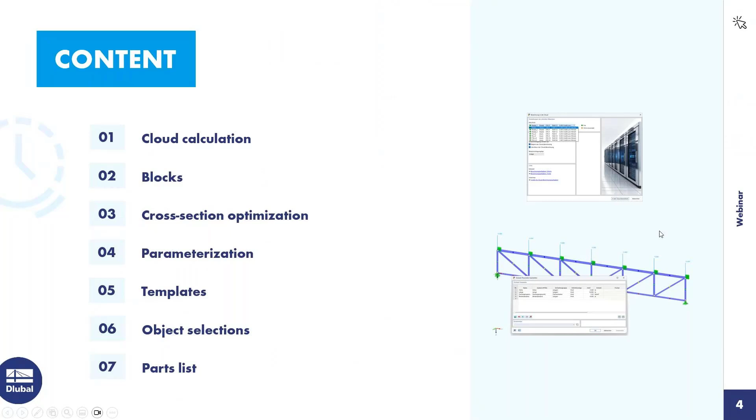So we turn to the first point, cloud calculation. What are the advantages? The most important advantage in my eyes is that your own computer is not burdened by the calculation. Also important: when you send the calculation to the cloud and you leave the program, another colleague, for example, can use your license. You don't block the license. It's useful if your own computer is not powerful or for large models.

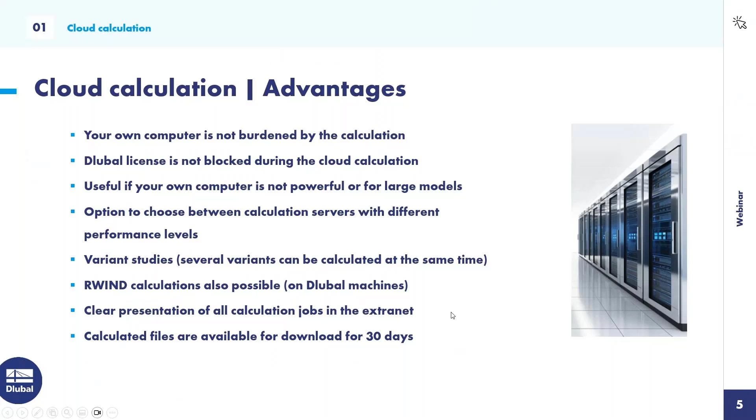You can choose between different servers; I will show that later. You can do variant studies. Also, RWIND calculations are possible. And you can see the calculations in the extranet or the calculation jobs. I will show that as well. And the calculated files are available for download for 30 days. That's the workflow. I will show the workflow directly in the program.

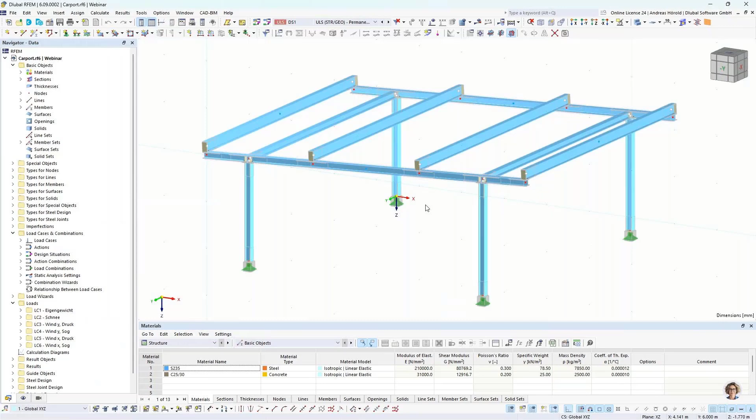Okay, then we turn to the program. That's a model from a former webinar with 16 steel joints. The calculation would take some time. It doesn't contain any results at the moment. That's why we would like to calculate it in the cloud. You can reach the cloud with that button, calculate in the cloud, or you can find it under calculate in cloud.

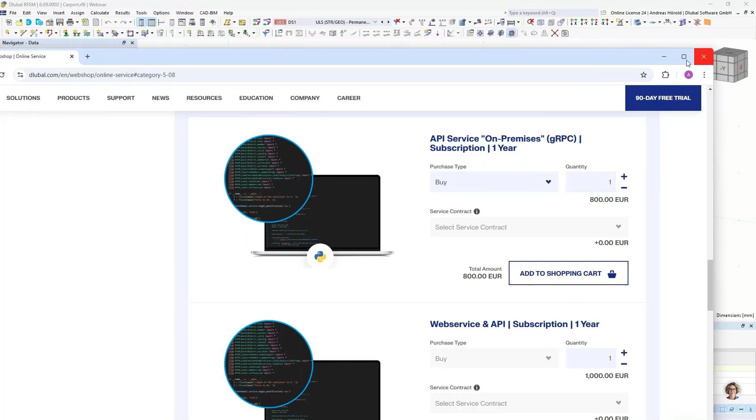So the first step is you have to buy credits for cloud calculation. I press that link, then we turn to our website. You have to select more from this category, and you see the credits, and you can buy the credits. If you buy 1,000 credits, it costs 100 euros, and 5,000 credits, 400 euros. In that case, one credit would cost 10 cents. Okay, we turn back to RFEM.

Then you need to select the virtual machine, the Dlubal servers. With those servers, you can also do RWIND calculations, and those are the Microsoft Azure servers. You can do a plausibility check before sending the file to the cloud. And you can also let it send notifications at the start and at the completion of the cloud calculation. I would recommend at least selecting that option, so that you will be informed immediately after the cloud calculation is done.

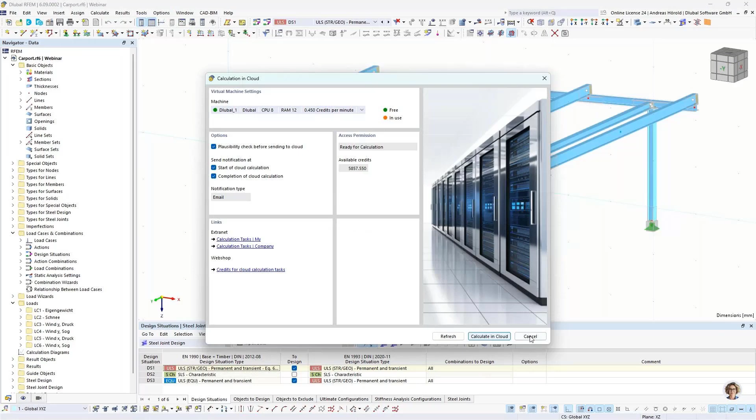Okay, then we would start the calculation by pressing that button. I did that already last week. That's why we turn directly to extranet calculation tasks. I also got an email with a link, but you can also find the link here, API and cloud, and you can see that's the file, carport. It was calculated successfully. That would be the price. Then I downloaded the file with that link. That's the same link as in the email.

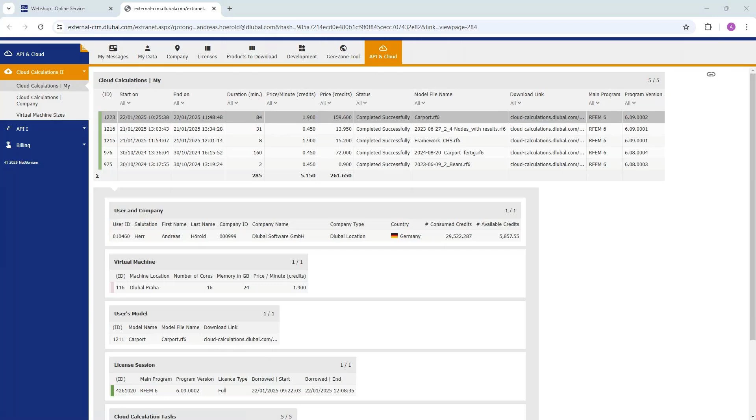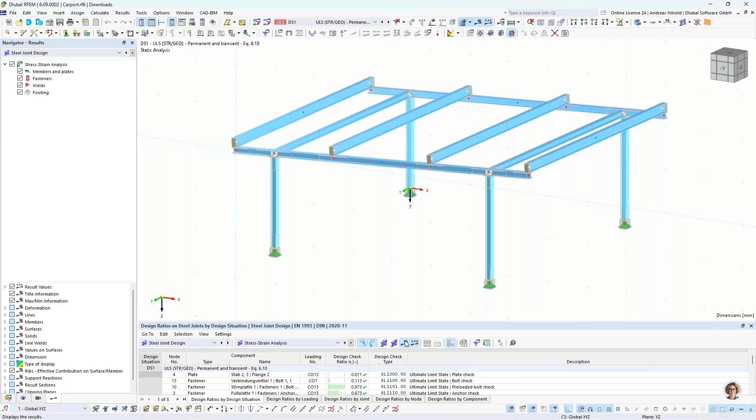And now I search it in my Explorer. Just a moment. At first I turn back to RFEM. And now I open the calculated file. It's more than 3 gigabytes large, that's why it takes some seconds until it opens. We wait some time. If the file is larger, you may get a zip file, and then you have to unpack it before opening. So now we have results here for all nodes and all joints. Okay, that should be all for the cloud calculation.

I close the files. And we start with a new file, and with that file I show the other features such as blocks, optimization, parameterization, templates, and so on. So, top left, new model.

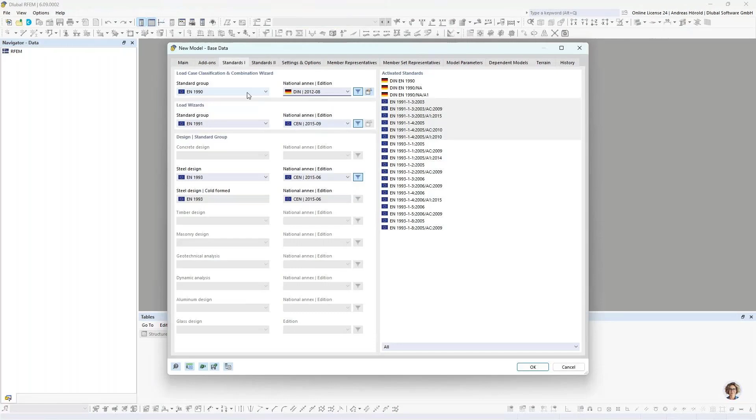I will show all on a truss, and I would like to do a steel design. That's important to select it, otherwise I couldn't show the optimization. I select the European standards and the German national annexes. Okay. And we use also member representatives.

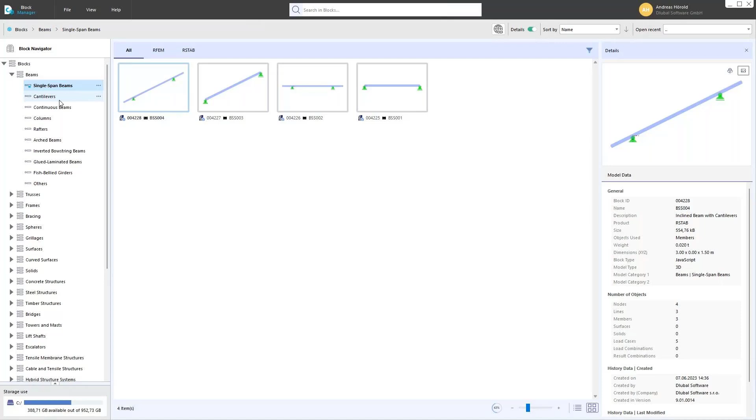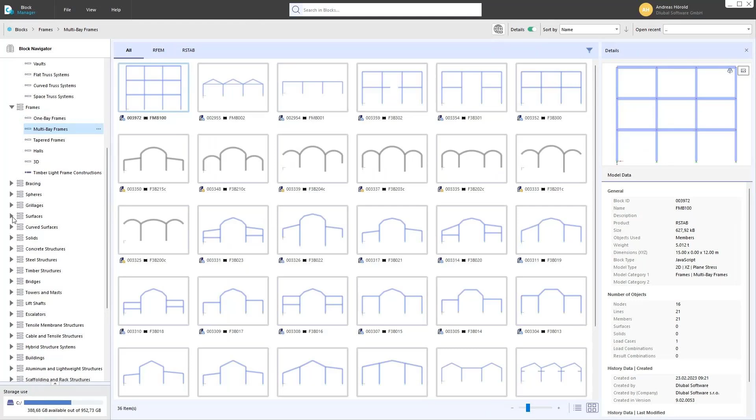So that's the empty model. And now I turn to the blocks. You can see that left above, block manager. And you can see all the parameterized blocks, single span beams, continuous beams, columns, arched beams, trusses, 2D, 3D frames, and so on. Maybe show some other things, surfaces.

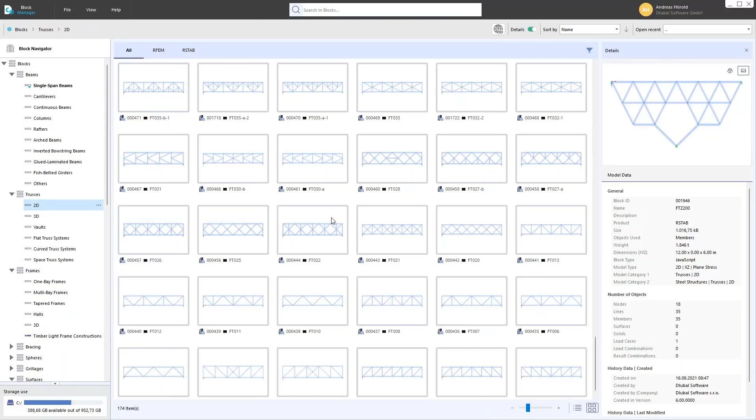What is also important, maybe bridges. Yeah, just take a look at the blocks, what is useful for you. I will show that on a simple example on a 2D truss. I select this one. Okay, those are the dialogues of the block. Main, structure, categorization, JavaScript. On the main dialog, you can, for example, select the position of insert point. That's okay in our case.

I think the most important dialog is the structure. You can modify the parameters. And in this dialog, you could change the JavaScript code. You could add more parameters. Just uncheck that button below. And now you could modify the code. I will show how you can add parameters without programming knowledge, but later.

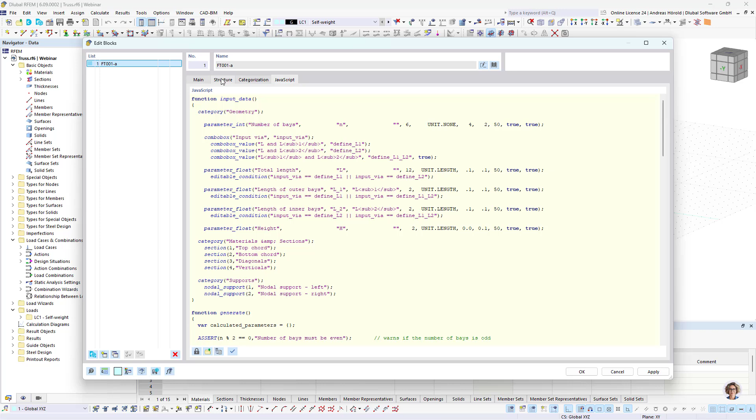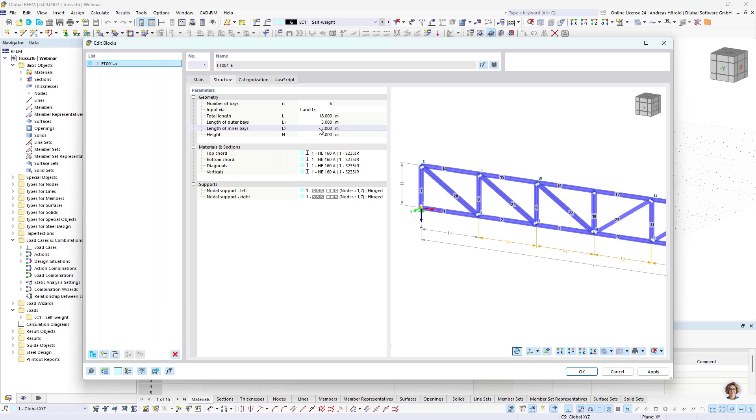Okay, then number of bays, that's okay, 6. Then input via L and L1. I enter the total length, 18 meters in our case. Then the length of the outer bay should be 3 meters. And the length of the inner bay is calculated automatically. The height is okay. I switch the view. So, and I modify the top chord. It should be an HEA 200. Okay, the material is okay, S235.

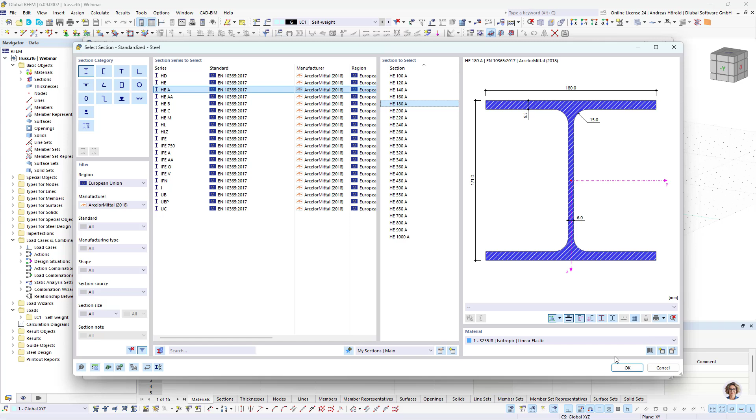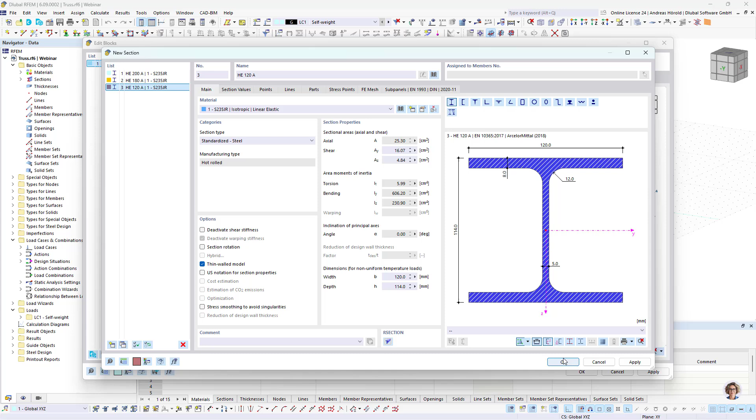Okay. The bottom chord should be also another cross section. I change it to HEA 180. This one, okay. And for the diagonals and verticals, we create a new section, an HEA 120, sorry. Okay. So the model, or the block is finished. We can press OK.

So, and this is our model. The member representatives are created automatically. All objects with the same properties or with the same length and the same cross section are collected in one member representative. And we have to select or modify or enter the design properties only for one member representative. But we will do that later.

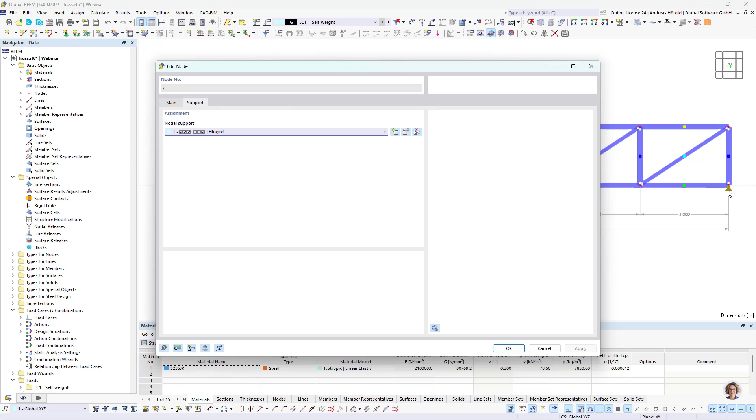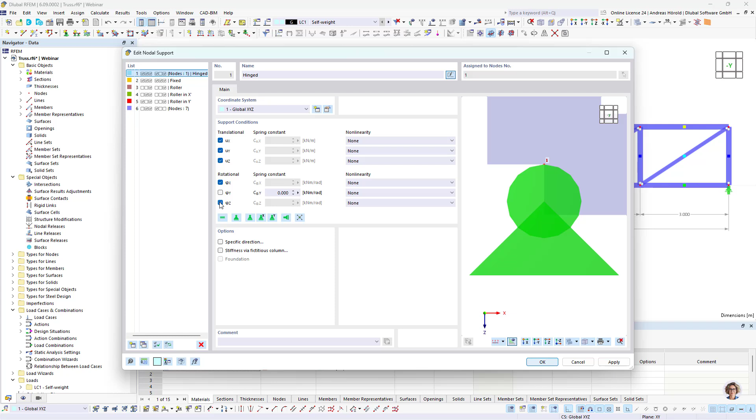So at first we explode the block with right click on blocks. And now we lost all the parameters. But as I said, I will create the parameters later with another method, and without programming language knowledge. So I modify the supports. This one should be movable in X direction. So this one, okay. So I also modified this one. Okay, around the longitudinal axis.

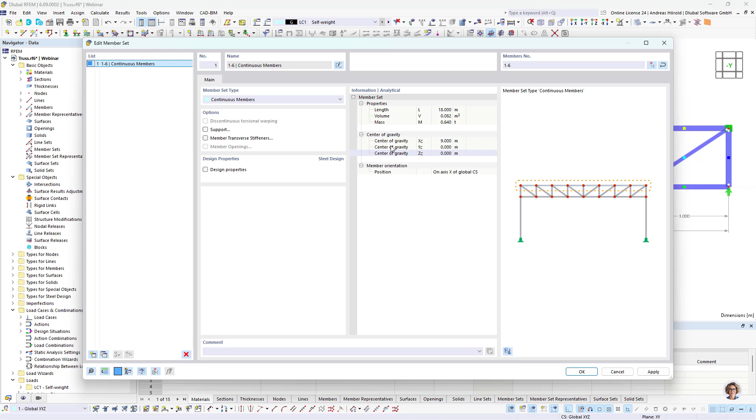Okay, and we have to support the truss in Y direction on the upper chord. So left above, new nodal support in Y direction. Okay. The model is completed now. We create a member set for the lower chord members. Create member set, because later we will check if the deformation for the 18 meters is low enough. So,

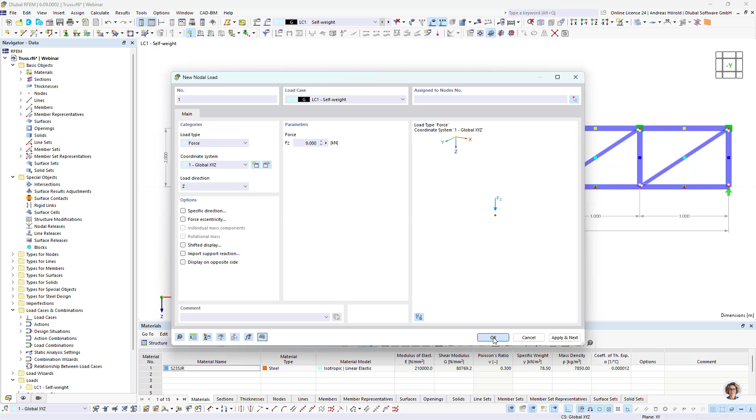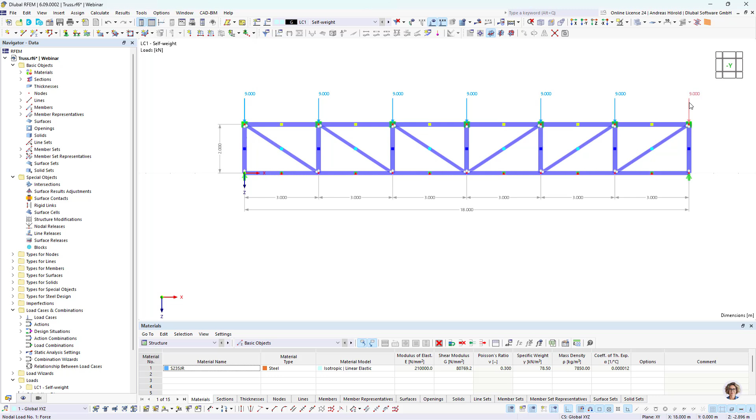okay. So the next step are the loads. We enter the load case self-weight, some forces, 9 kilonewton in Z direction. Okay. On the nodes. Can decrease it a little bit. Okay. Yeah, and we assume there are neighbor trusses. That's why the value at the edge is the same as on the inner nodes.

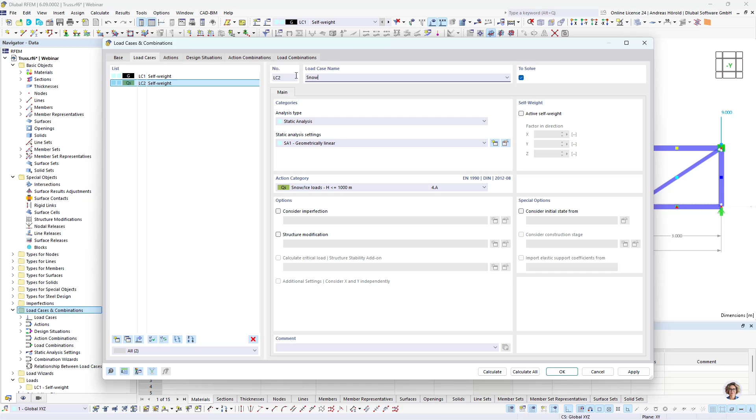Okay, so then we turn to the dialog load cases and combinations. And we create a new load case. Yeah, those are the base data that we entered at the beginning. Load cases. Now we copied that load case. We deactivate the self-weight. Then it should be snow. And we call it snow. Okay. And we have to modify the load. 15 kilonewton. Yeah, we have got only 2 load cases in that example.

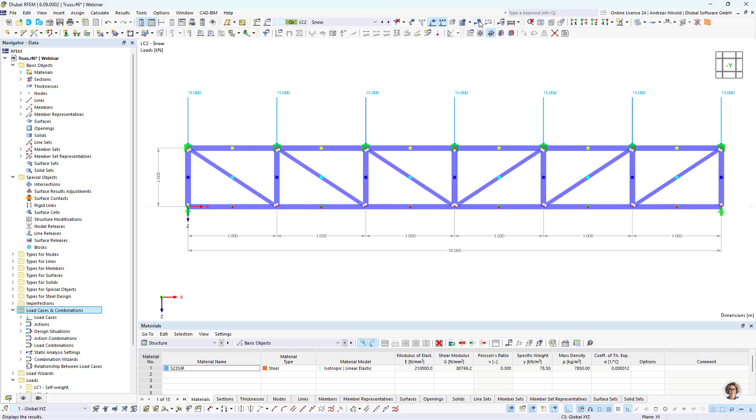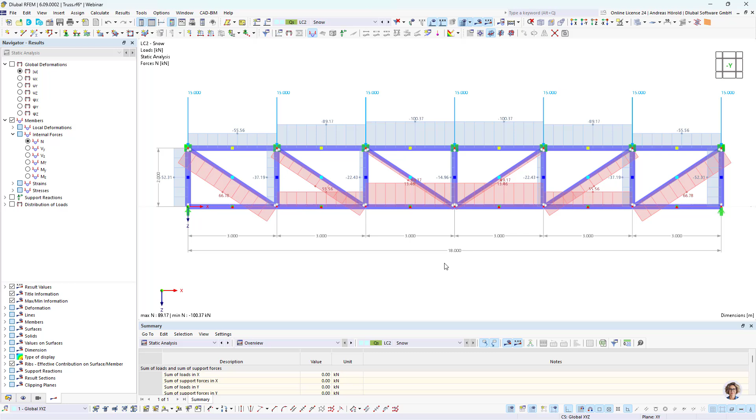That is enough. So in the next step, we create imperfections. But before we do that, we calculate that load case, so that we can see where is tension and where is pressure. The pressure should be on the upper chord and on the vertical beams. So members, internal forces N, okay. Now you can see there's pressure on the upper chord and the verticals. Okay, that's why we create design settings where we would check the buckling for those members with pressure.

Okay, and in the first step, we enter imperfections. New member imperfection above. I call it imp. Okay. We create initial bow according to Eurocode 3 in direction of the weak axis. Okay, and we apply it for the upper chord and the verticals.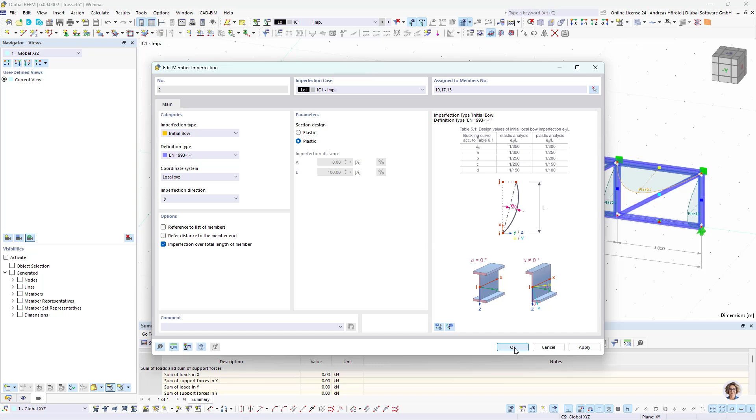So that looks almost good, but I changed the direction for these 3 imperfections. Double click, -y. Okay. Yeah, the curves are looking quite better.

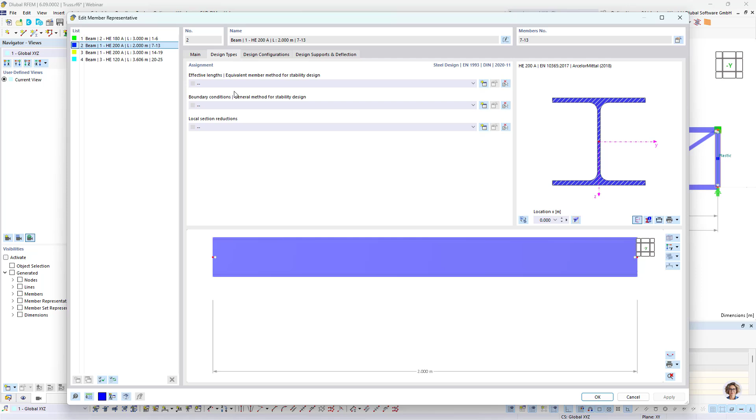So then the next step is we have to select the design settings. At first for this member representative, I enter a new effective length. That is what we determine the flexural buckling, torsional buckling, and lateral torsional buckling. So the supports at the beginning and the end are created automatically. And we enter the effective length factor 1.

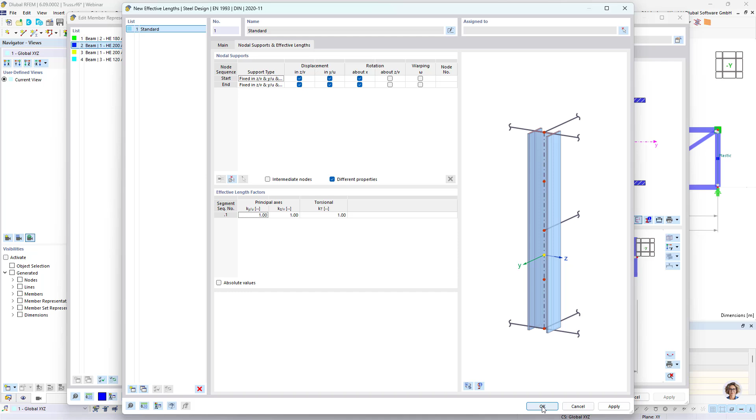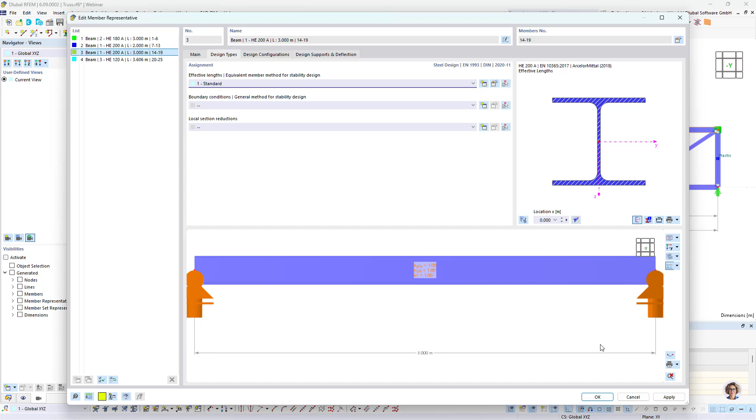We assigned imperfections. We calculate according to second order theory. And with these settings we can design according to Eurocode 3. Okay. And for the upper chord the same. For the member representative, design type standard, with the buckling length factor 1. And if you want to design according to the general method, you have to enter boundary conditions. We use the equivalent member method according to Eurocode 3. Okay.

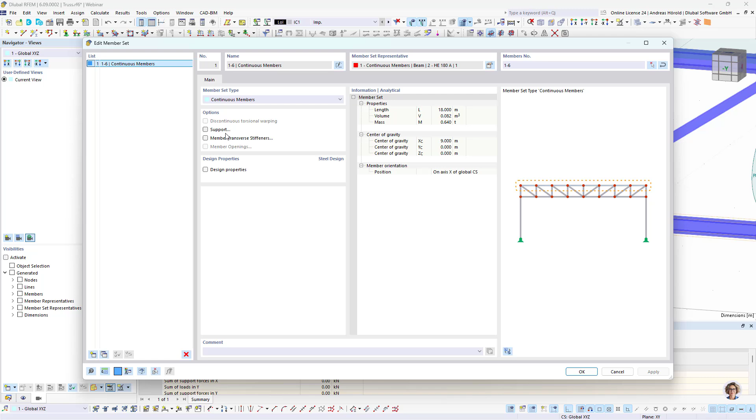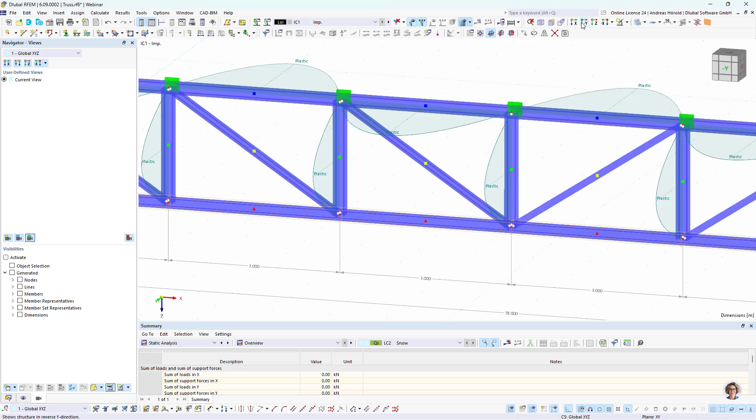So that's all for the ultimate limit state design. For the serviceability limit state design, we have to create settings for the member set. So I select design properties. And you can see where are the 18 meters. That's important for the deformation design. So we can start the steel design now. Okay.

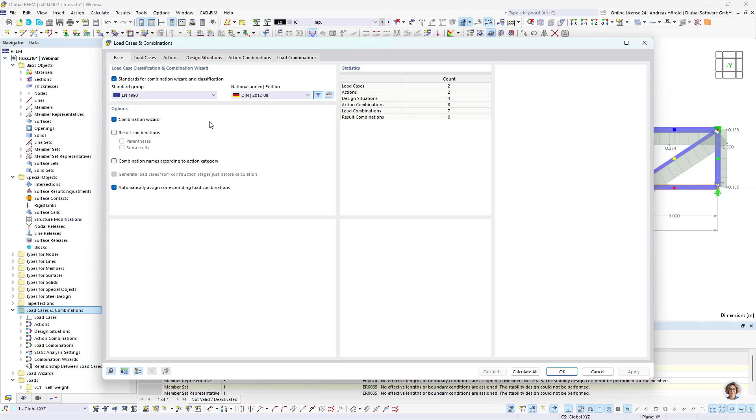I forgot something. You can see the design ratios, but I have to turn back again to the load cases and combinations, the design situations. We want to design only this design situation for the ultimate limit state and only the design situation for the serviceability limit state characteristic, and for the geometrically linear method. So we can delete these two design situations.

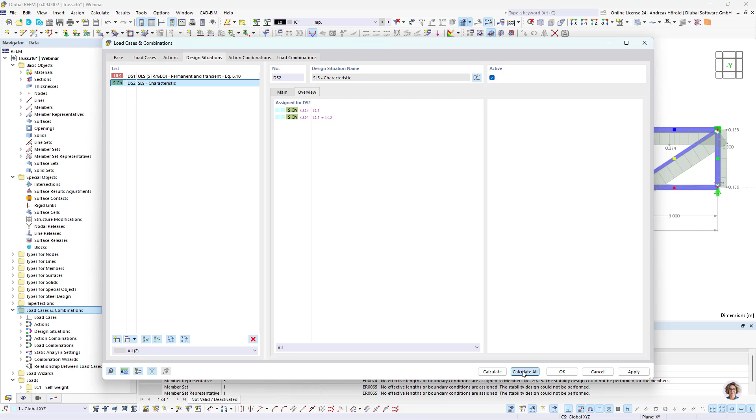So in the overview, we have to create the load combinations. And you can also see the imperfections are assigned to the combinations for the ultimate limit state design. And when I turn back to the design situations, you can see the assigned combinations. So that's okay. And now we can calculate all again. Now we will get the right results.

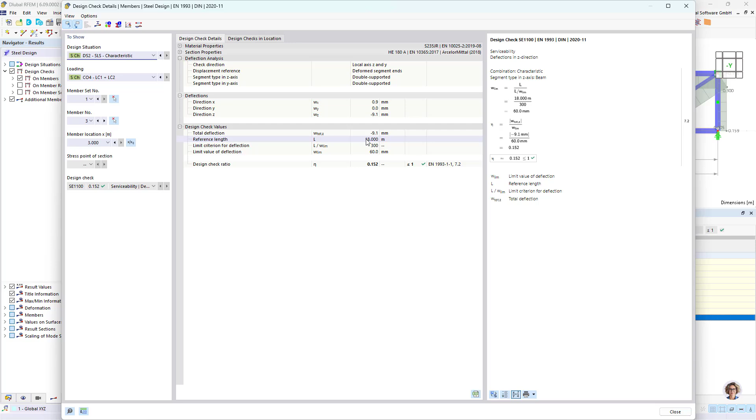Okay, design ratios on members. I select design ratios by section. You can see there are quite low design check ratios. And in the next step, we would like to optimize these cross sections. At first, I would like to switch to design ratios by member set. And you can see the serviceability design, deflection in z-direction. When I double click on that formula, now you can see the design check is for 18 meters. That's okay.

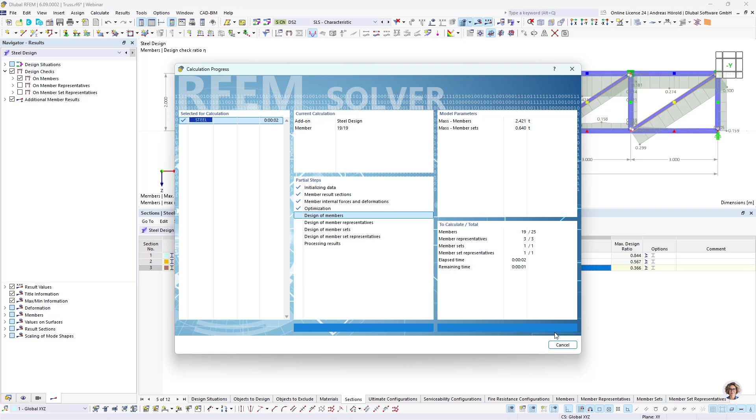So, as I said, we optimize the cross sections in the next step. I turn back to input data, then sections. You can see the design ratios, and we select optimize current row for all. And we do the steel design again. And now you can see the higher maximum design ratios. But the section for the global model isn't changed. We have to do that in the next step.

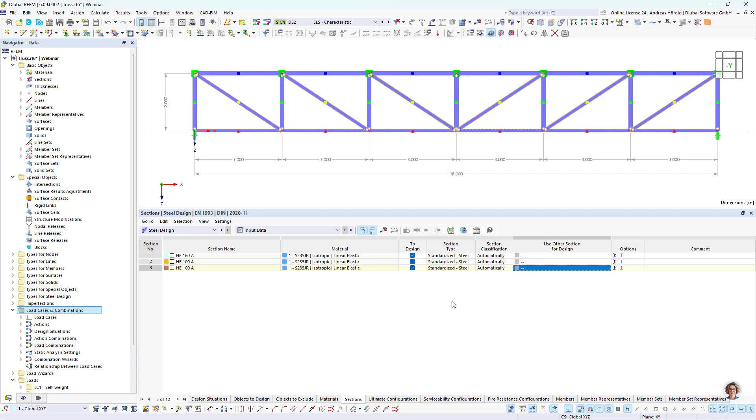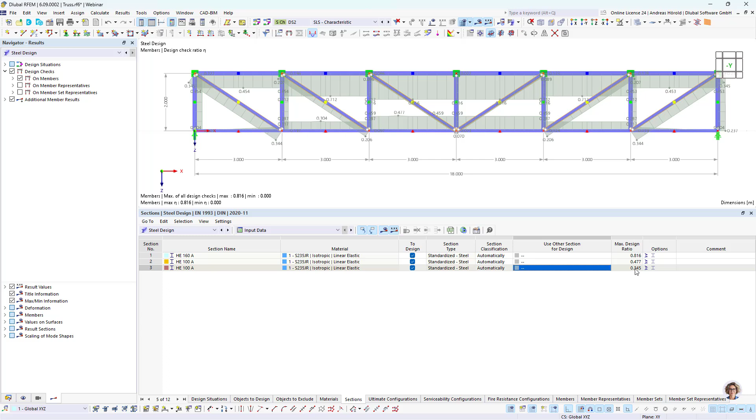Use all optimized sections in model, so that we consider in the global calculation the right stiffnesses of the sections. So we calculate again. And now we got the right design ratios. Okay, then that should be all for the optimization.

Now we turn to the parameterization. I would like to parameterize loads, only the self-weight load, then the height and the length. So at first we have to turn back to the structure on the table, and you can find the global parameters here. At first we enter the height. The current height is 2 meters. Then the length. Current length is 18 meters.

Then self-weight roof. The unit group isn't lengths. And now you can see what parameters you can define: materials, section parameters, model parameters, and load parameters. So we select force per unit... force.

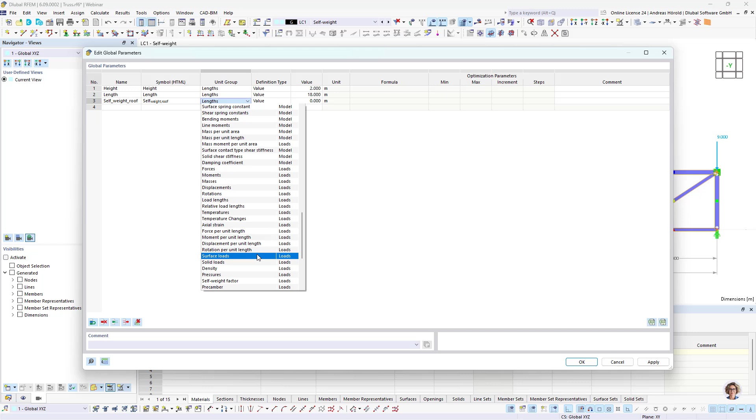We select surface loads. And 0.5 kilonewton per square meter is the current self-weight of the roof. And we enter the spacing of the trusses. The spacing of the trusses at the moment is 6 meters. Okay, that's all. And we can start with the parameterization.

So in the first step, we select all these nodes on the upper chord. Then with a right click, I go to Nodes, Edit. And when you press on that button, you can enter a formula. I click on that button, Edit Global Parameters. I double click on the height, or I press OK and Insert. And we have to enter minus height because the direction of the Z-axis is downwards. Okay.

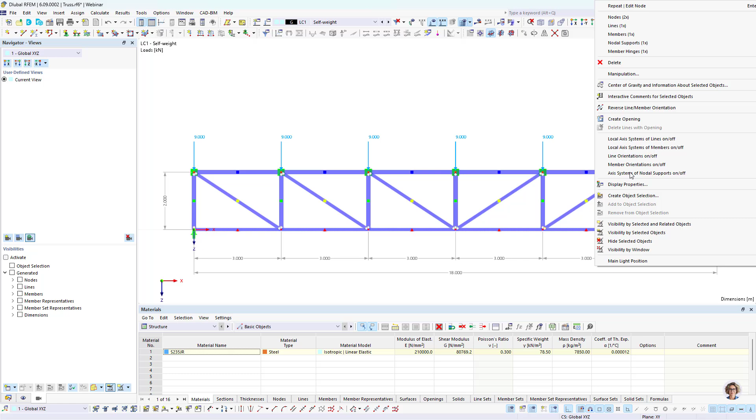So in the next step, I select these nodes, right click, nodes, edit. This is a similar workflow. I double click on the length, 18 meters. Okay. And we have to do that for the other nodes as well, but with another formula: nodes, edit formula, length multiplied by 5 divided by 6. Okay.

So then these nodes, edit, length multiplied by 4 divided by 6. I can copy that with Control C. Okay. So then these nodes, edit formula, Control V, and I enter 3 here, or half would be possible, 3 by 6. Okay.

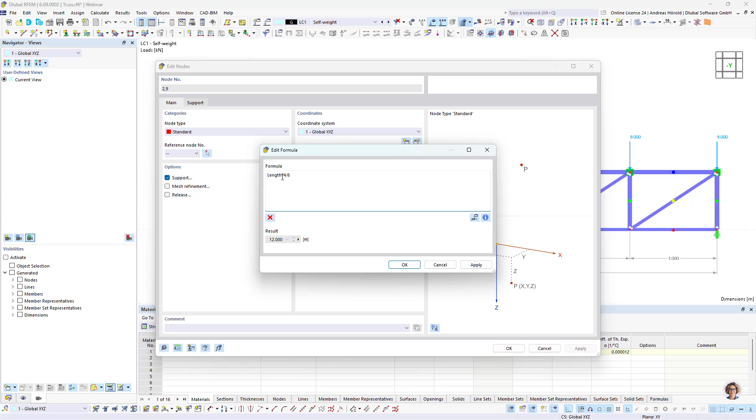Okay, now the last step. So those are these parameters. And now we parameterize the load only for the self-weight load case. It would be the same workflow for the snow load case. So double click on that load. Then I edit the formula.

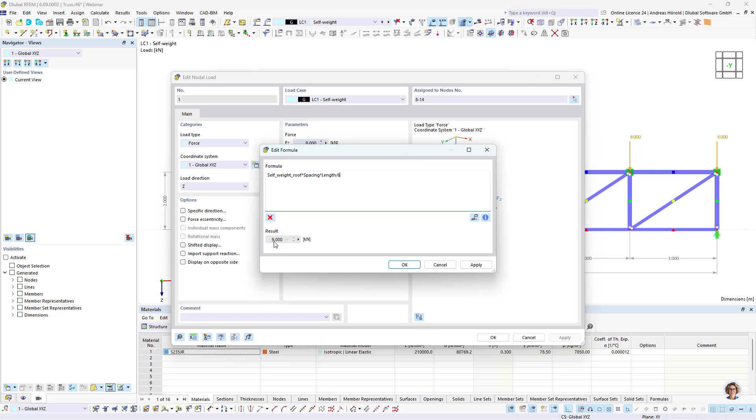Then self-weight of the roof multiplied by the spacing, multiplied by the length and divided by 6. Okay, and we've got 9 kilonewton. Okay, all parameters are set, and now we turn back to that dialog.

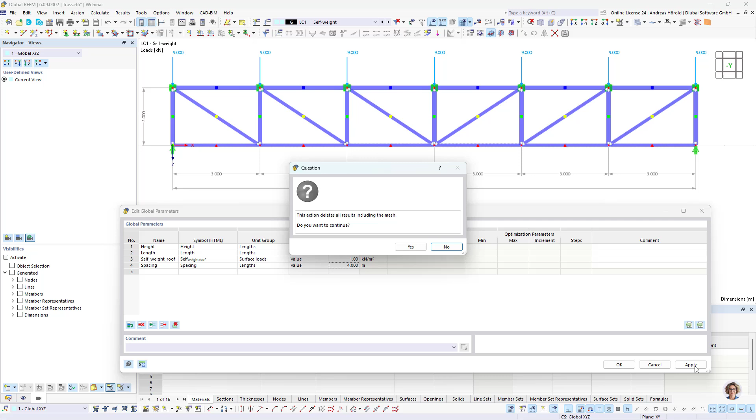I increase the dialog a little bit. And now we can change the values. For example, 1.5, 20 meters, 1 kilonewton, another spacing, and with apply, all is changed. That would be 20 meters, 1, 4, apply. Yes.

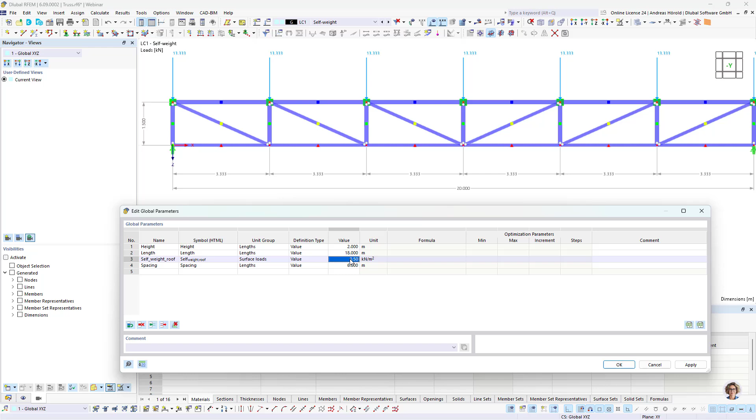Okay, those are the new distances and loads, and you can modify all what you want, or you can modify only these parameters. So I change it back again. So that's the original truss.

And if you don't want to lose the design properties, parameterization, and so on, then we go to File, then save, or we can save it in the first step. Save. And then save as template. In the first step, we have to enter a template category name. I call it parallel trusses. Create a new folder.

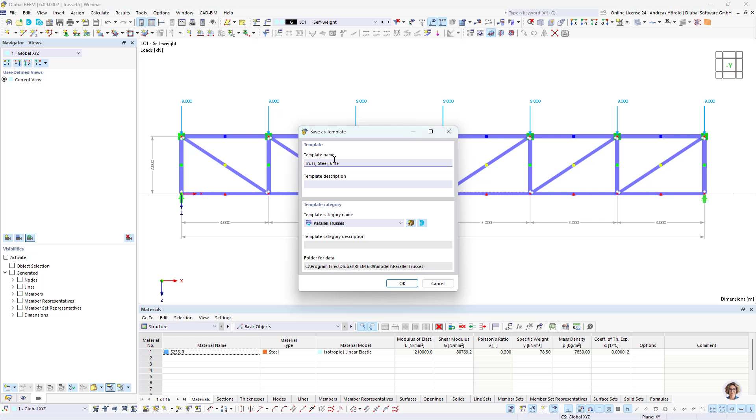And you can also use another folder, for example, on a server, so that your colleagues can also use the parameterized template. Okay, and I call it truss, steel, 6 fields. Okay.

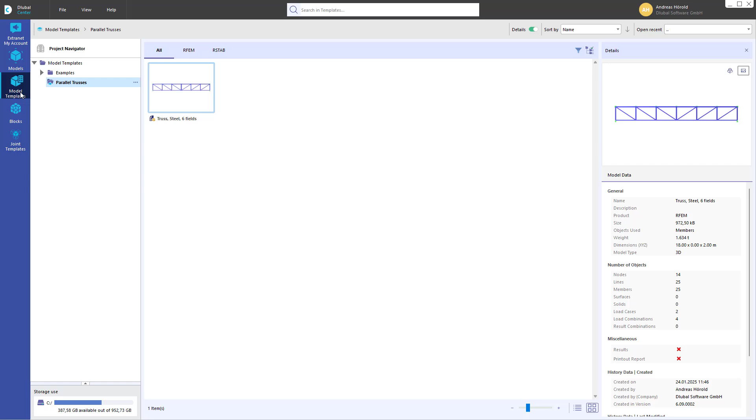So now we can close that model, and when we go in the Dlubal Center, we can see the model templates here. We have got only one template. I double click on it. And you will see the parameters are still there. I call it T1. Okay. Yeah, and the parameters are still there.

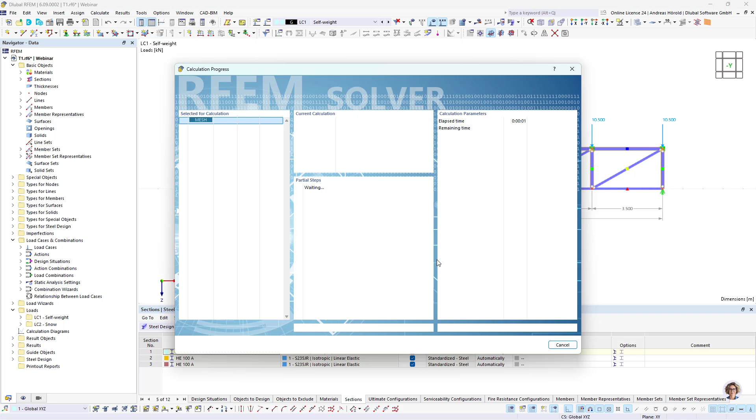So let's change only one parameter, the length, 21 meters. Okay, and now let's check if the steel design is still okay. Okay, this is not the case. The design ratio is higher than 1. The next step would be changing the cross-section, or we could do an optimization for the cross-section of the upper chord. But we don't do that in that case.

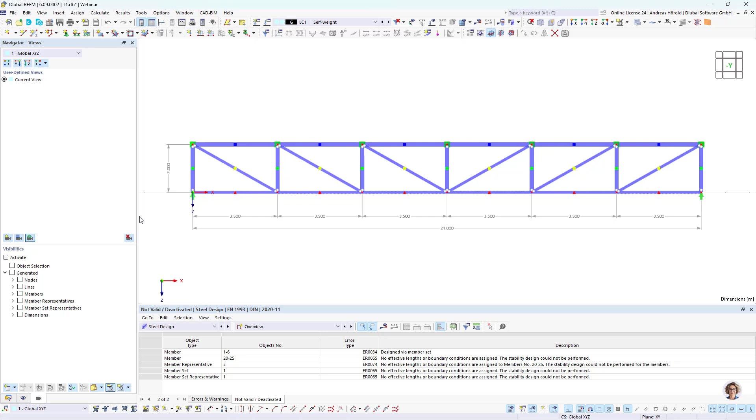Okay, then we turn to the next feature, object selection. In RFEM 5, it was in another place. In RFEM 6, you can find it under guide objects in the navigator data, and then object selection. Now with a right click, you can create a new object selection for nodes, members. You can use it for the basic objects, then types for nodes, and so on. I show it on an example for members.

Definition: member section equals this one, and I call it upper chord. Then we create a new selection, also members, section, this one, lower chord. Then a new one, members, section, this one.

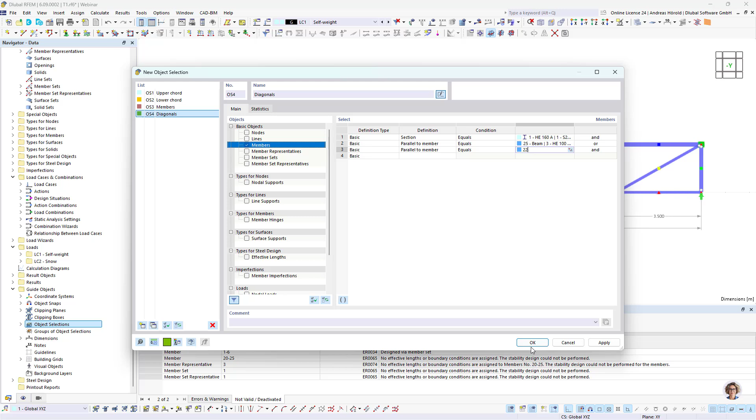Okay, that's all. Now we turn left at the bottom to views and we activate the object selection. Now all is selected. So now only the upper chord. There's something wrong. Lower chord is okay. Verticals, I can rename it. Verticals. Okay. Diagonals is okay as well.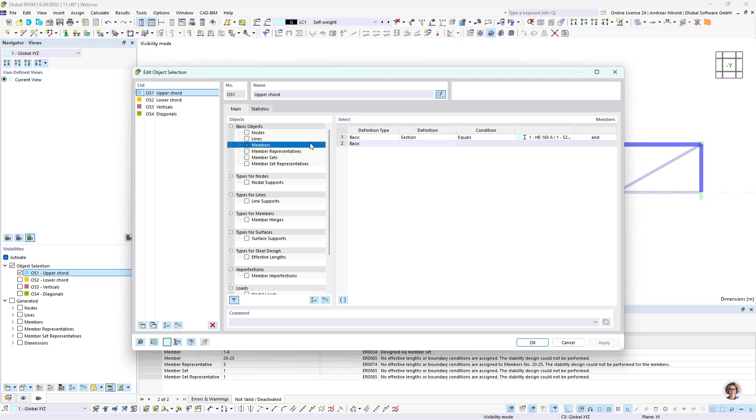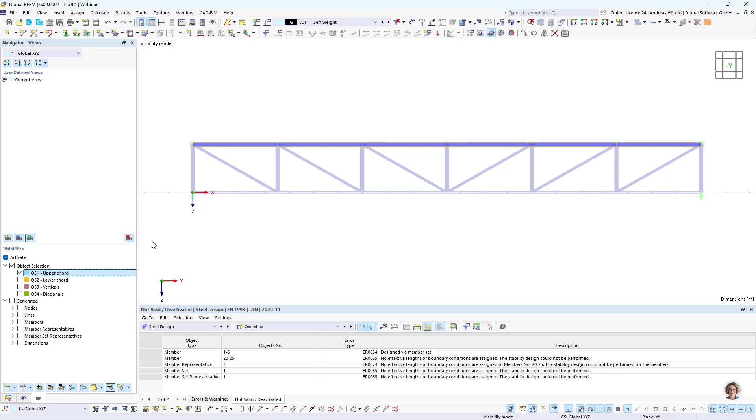What is wrong? Section equals this one. The rest is okay. Now it is okay for the diagonals. What is wrong for the upper chord? Edit, equals this one. And parallel to member, this one. Okay, now it's okay. Good.

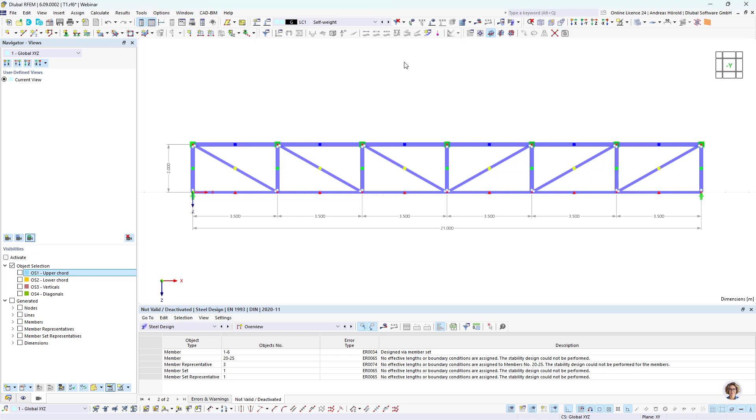Then we turn to the last feature, the parts lists. How can you create a parts list? In the printout report. At first I have to calculate all. I only calculated the self-weight load case. Calculate all. So left at the bottom, we turn to the navigator data. We create a new printout report.

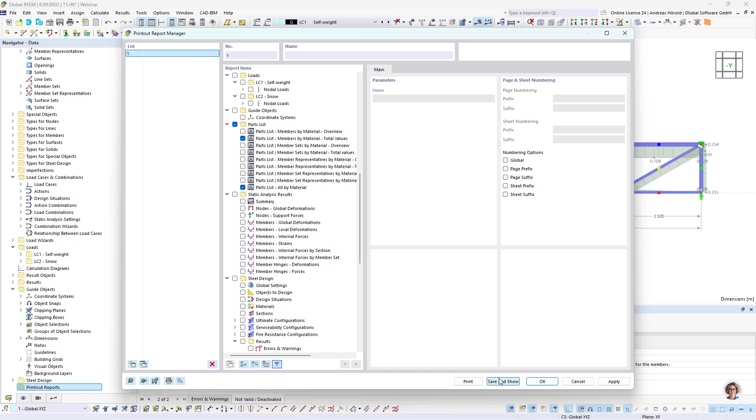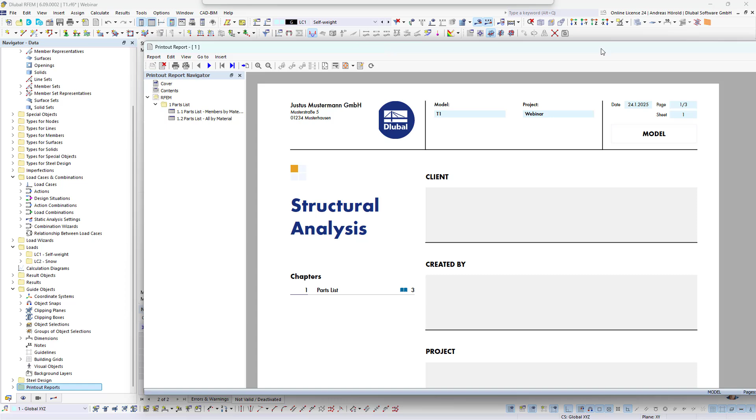I select all and deselect all. And I create only a parts list. For example, members by material, total values, and parts lists all by material. Press save and show. And the printout report will be created only with the parts list. I move it from the other screen to this screen. You can see the different cross sections, the length, total surface area, and so on. And the total mass, for example.

Okay. That should be all for this webinar. I hope you liked some features and you learned a little bit.